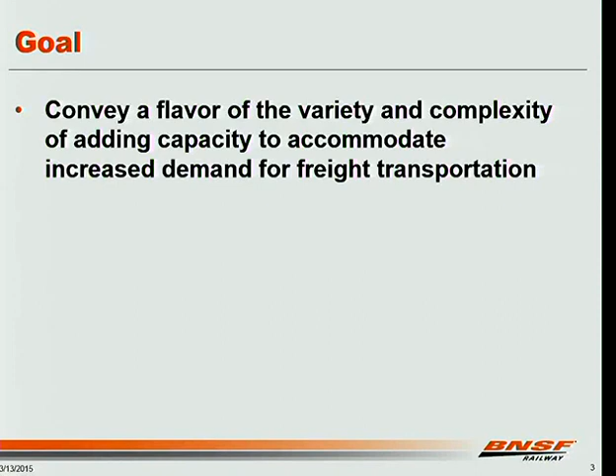I will tell you that this is going to be a very different presentation. This will be light on numbers, light on science, light on graphs. What I wanted to try to do in this presentation is convey to everyone here a flavor of the stuff that we do, the variety, the complexity of what it means to actually try to add capacity to your railroad infrastructure, especially when you're trying to accommodate increased demand in freight transportation, which, unlike passenger transportation, can grow quickly and unpredictably as markets change.

So I'll give you a real quick overview of where I'm talking about, go through where the projects we've had have been over the last few years, just physically where they've been located, and then go through a few different kinds of projects we've done and try to give one quick example of each, and then give my soapbox stuff at the end.

I do have a lot of slides. I'm going to try to go through them quickly. However, it is fine with me if we don't get to all of them. So please, if you have questions and you want to stop me and ask a question, feel free to do so. I'd rather talk about what you want to talk about than get through necessarily everything that's in the presentation.

So BNSF, this is BNSF's northern region, roughly speaking, and I don't want to spend too much time on it other than to point out that it spans roughly from Chicago to the Pacific Northwest. The region I'll be talking about in more detail is this area here, which, as you can see, is not only connected to Chicago and the PNW, but also has lines that go south towards the Texas-Oklahoma area and the Gulf of Mexico.

More specifically, this is the region I'm going to be talking about, partly because it's been the most interesting place to be railroading for the last few years, but also because it's where I work, so I know something about it. We do have a lot of stuff going on in other places as well, I just am not qualified to present on it, so I thought I'd talk about this instead. Some of the high points here: Minneapolis-St. Paul is here, Chicago is down here.

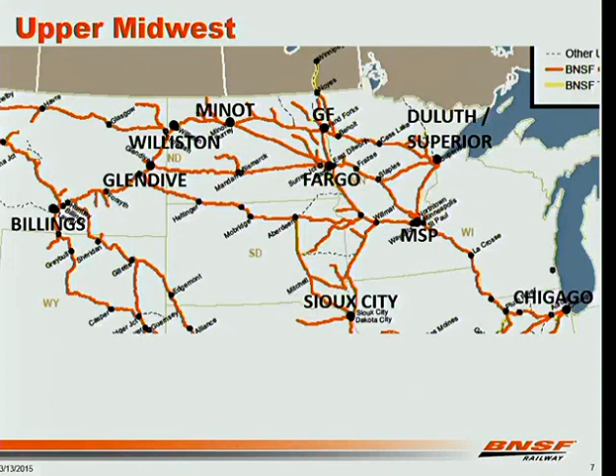Whereas I guess I would say Minot is kind of on the eastern fringe of the Bakken development, and it serves as kind of the commercial and business center for much of the region.

Roughly what's going on is a huge increase in traffic. Since 2009, traffic into North Dakota has basically doubled. Traffic out of North Dakota has basically tripled.

Every dot on here represents a place where we've either had a new or expanded customer facility come online. A lot of those in the Minot area, where you see sort of between Minot and Glasgow and between Bismarck and Forsyth, a lot of those are related to oil.

But even the oil, it's not necessarily shipping oil. We ship a lot of sand, we ship a lot of pipe, and I believe we ship a fair amount of building supplies and everything just to deal with the construction that attends an oil boom.

However, you also see that we have dots all over the place, and most of those don't have anything to do with oil. What those have to do is the agricultural industry in that part of the country that continues to grow.

Improvements in crop technology, and some changes in the continuing evolution of how product is shipped, have resulted in some big years for agricultural shipments as well. They're not as big a percentage increase as, say, the increase in crude by rail, but in absolute volume terms, I don't remember whether they're larger, as large, or slightly less, but they're big.

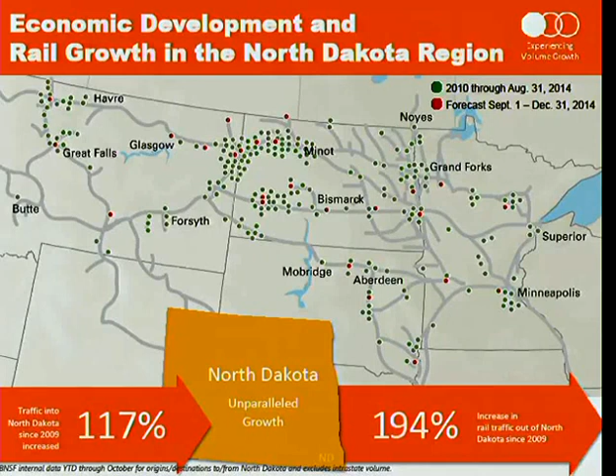So year by year: in 2011, which was my first year as a project engineer, we were focused on some improvements. We made a few improvements in the Minot area to deal with the nascent oil boom. We also made some improvements along our north-south corridor because we thought a lot of that oil was going to be going to the center, to the Texas-Oklahoma area where traditional domestic oil markets were.

That did not actually pan out that way, by the way. So we did some work in 2011. We haven't done a whole lot there since, although we have some more in the works.

2012 to 2014, we were scrambling to catch up to demand. That's probably not a fair statement - we were working hard. We had traffic that exceeded our forecasts.

The ever unpredictable grain harvest came in big for several years in a row. We had some really rough weather last winter, and all of it combined to create a huge discrepancy between how much people wanted to ship and how much we were able to ship. That led to some service problems.

But I want to point out that we had been working on expanding capacity before that happened. Unfortunately, we do not have a perfect crystal ball, and we were not able to get ahead of it until - well, I guess I would say we still aren't ahead of it.

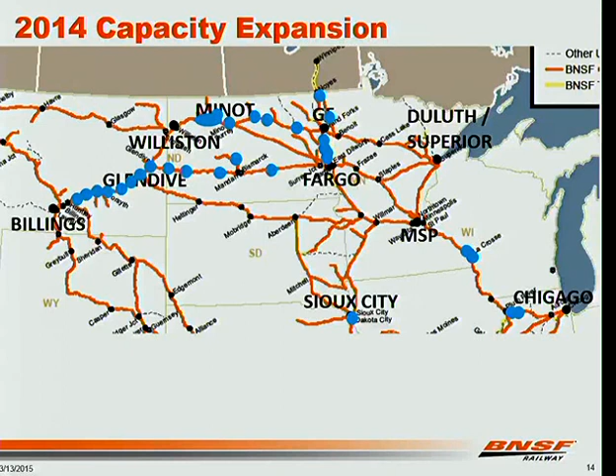You see that most of this is all concentrated right there in North Dakota. That's where we had the biggest mismatch between the traffic that people wanted to ship and the infrastructure that we had in place. Coming into 2015,

having blessedly had a relatively mild winter so far, we're in much better shape. We've added a lot of capacity in North Dakota. We have to continue our biggest project out there, which is a large double-track project on that Glasgow subdivision from Minot to Williston.

And we have some additional CTC to install. I'll take a brief side note to mention that we've delayed some signal work, some signal capacity improvements, just because of the sheer volume of signal work we've had to do to implement PTC. We're starting to turn the corner on the signal infrastructure side of PTC, and I think we're going to start to see some additional signal improvements aimed at capacity as we free up some of our people to do that.

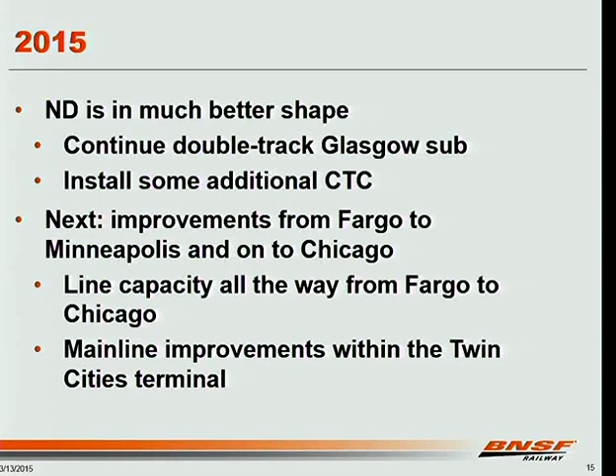So we're kind of working on North Dakota. We've got that sorted out, at least for now. Still have more work to do, but we're on a good path. The next challenge is, now that all this traffic can move out of North Dakota, it moves right into Minnesota, and we have to make room for it to flow through Minnesota.

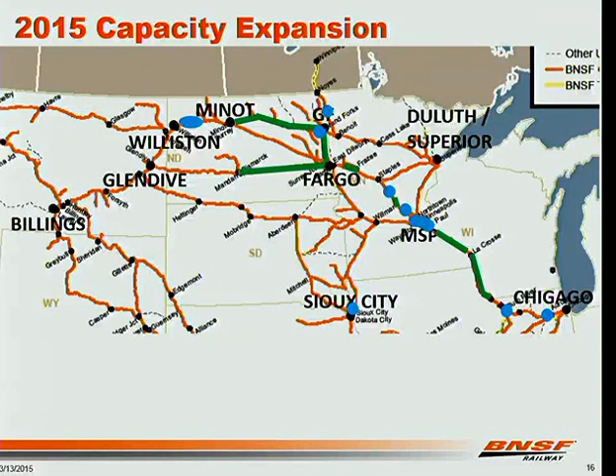And so that's really the focus this year, is to add capacity the rest of the way down to Chicago. So this is where our projects are in 2015. The green lines are CTC projects, and the blue dots are track improvements. To go through, you can categorize these in different ways, but I'm going to talk about several different types of projects that we do.

The first broad category is simply line expansion. You have trains that need to move from point A to point B. How do you get them where they need to go? The prototypical example of expanding line capacity is if you have a single track line, you build a new siding. In some cases, you might extend an existing siding that's too short for modern trains or something like that.

The only point I want to convey by talking about this project is how, once you've made the decision to add a siding, you've only begun really my job, which is first and foremost, before you can do anything else, figure out where the siding is going to go.

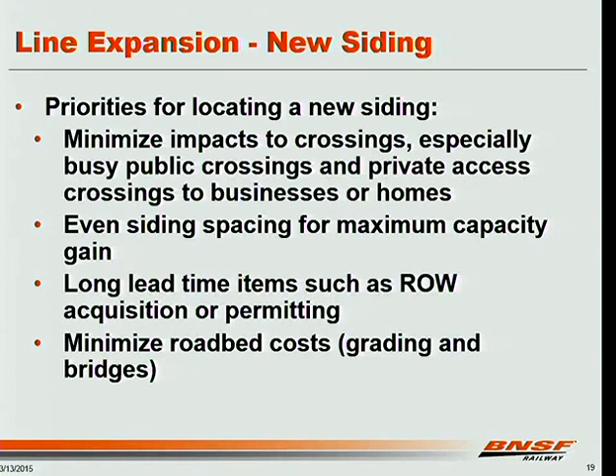It wound up going through condemnation, which is quite unusual. And of course, minimizing cost - you want to avoid large cuts, large fills, and especially large bridges. So those are kind of what we look at.

Here's an example. Someone said, go build a siding on our Hillsboro subdivision between Hillsboro and Thompson, North Dakota. There's one siding in between there, but it was only about 5,000 feet long - not long enough to hold the kind of trains we were running. On the other hand, you have this problem that there were roads on every section. We had a north-south line, and there were roads running along every east-west section line, township or county roads, literally for 50 miles in a row.

So we immediately started looking for - is there one of those roads that we think we could get away with closing that's located close enough to where we need this siding? So I was driving around. This is actually after I drove in on this grass road for quite a while. I actually saw these crossbucks from half a mile away through some tall weeds. Drove in there and found this crossing.

I will say we wind up doing this on a lot of projects where we target a road and see if we can go close it. This is the only one we've actually succeeded in doing so. People like their roads and their crossings.

Obviously, this road is not doing anyone any good. It's a safety hazard and a maintenance problem for the railroad. It's everything that shouldn't be there. Fortunately, the township more or less agreed, and we came to an amicable agreement to close the crossing. So immediately we knew where to put our siding based on that.

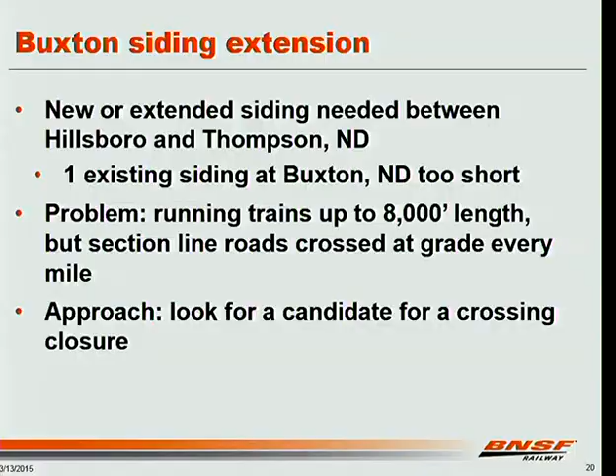On the other hand, the other prototypical example of line expansion is to add double track where you have single track. We wound up doing that on our Glasgow subdivision, but it took us a little while to get there. In 2012, we added one siding, and while we were in the process of building that, we were planning to do three new sidings in addition to that over the next three years—2013, '14, '15.

That was the plan as of August, as best I could find going through my records. By November, the plan was to build all three of those sidings the following year, in 2013, which was a challenge because we didn't have any of the engineering done, and we hadn't completed the required wetland delineations, which you can't do when they're under snow. So we had to work hard to get the engineering done on those in a timely manner.

So the following spring came before we could even get people out there really working on these three new sidings. Then word came down: we're going to finish those sidings, but we're also going to double track the whole subdivision. They wanted to do it over the next three years, so we're in the middle of that now.

But in 2013, they wanted us to build as much of the grade for the following year as we could. So we'd build the three new sidings and put them in service that year, plus build the grade for about 40 miles of double track that we'd then lay the following year.

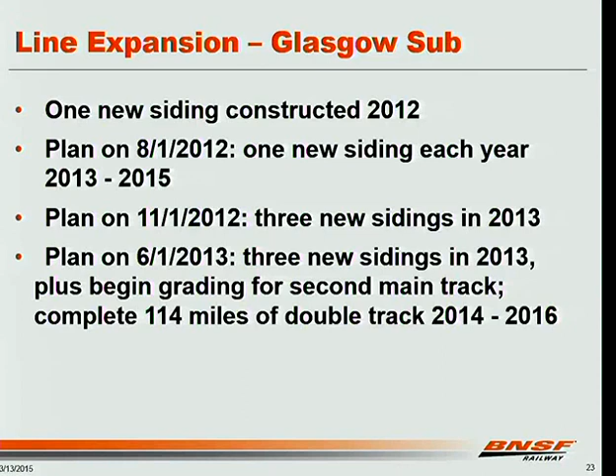Okay, you want us to build a second track and you want us to start on it tomorrow. There are some questions we have to ask, like where? There are two sides, and oftentimes neither of them is perfect, but you have to figure out which is better.

And when you do have an obstacle, such as a large wetland, you have to figure out whether avoiding that obstacle makes up for the difficulty of having to transition your tracks to different sides for the new construction. What do we do with existing sidings? Do we want to just tie them into the double track, or keep some of them for staging trains or having faster trains overtake slower ones? And what right-of-way and permits do we need?

Those are hard questions, because to know the answer, you need to know where you actually need to work, where your grading limits go to. And to know that, you have to have something resembling your final construction plans.

So these are long lead time items that you can't start until you have the engineering up to a certain point. So in many cases that year, we actually wound up jumping the construction around a little bit based on where we had right-of-way and where we had permits and where we needed permits.

Fortunately, we had an excellent contractor working for us. Ames Construction did a fantastic job on this project and had worked with us enough to know that what the railroad wants is for them to get it done, and we're perfectly happy to hop around as needed in a way that we could both live with.

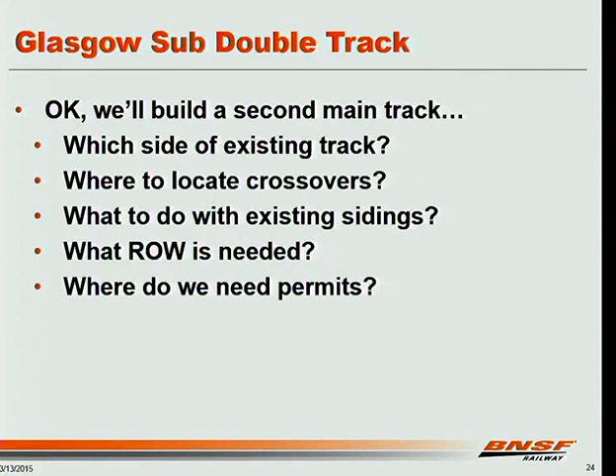Signal work has an arrangement these days that kind of splits the burden a little bit between contractors and employees.

So this is what it looks like overall, and this is only half of the Glasgow sub, but it's the part that concerned us most, from Minot over here in the east end, to Williston way up here. The blue lines are places where customers operate facilities. They either lease a small amount of track from us, but in most cases have built their own track to receive or load rail cars.

The red lines are capacity expansion projects that we completed between 2012 and 2013. We built the 4 new sidings that we talked about, as well as some improvements up in Williston Yard.

And then the solid green lines are areas that we graded in 2013 and started laying track in, I think it was February of 2014. The dashed lines are work that we did the grading for in 2014 and will lay the track for this year.

I bet track laying in February 2014 was fun. Yes, it was. Fortunately, I didn't have to go there and do it.

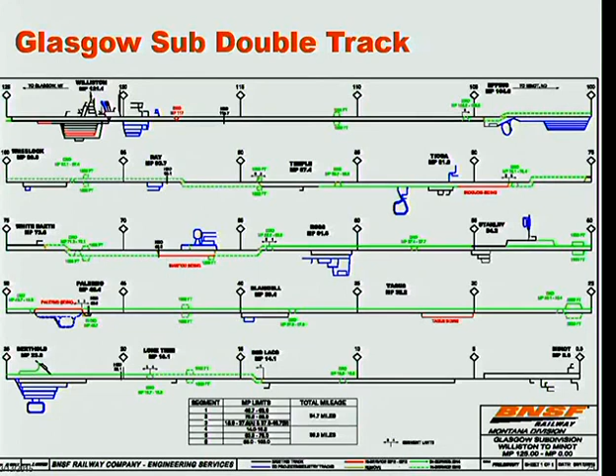And then the other, and in some ways maybe even more critical function to some people, is they serve as a place for maintenance gangs to tie up at the end of the day. As you can imagine, the people who approve these projects focus a lot more on train movement, so we tend to refer to them as set-out tracks if we want to keep them in the plan.

So anyhow, the solution is basically we had to go and build a lot of railroad on land that we didn't own. We couldn't own it because we couldn't get the title work done. And that actually is not so bad. We actually kind of do that routinely. You have to have some sort of contractual agreement with the owner that gives you the right to do what you're doing.

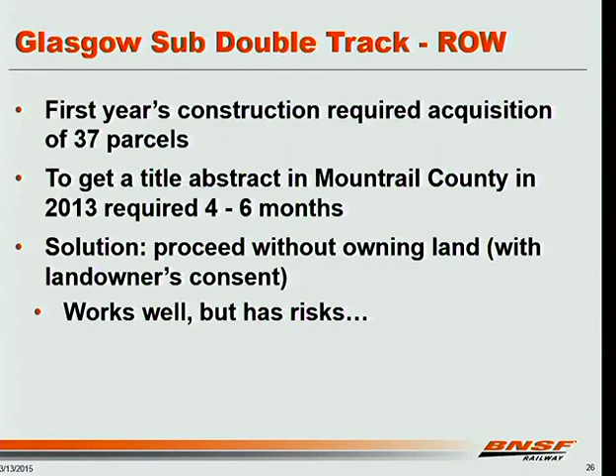It has some risks that we ran into. There were cases where landowners had easements across their property, third parties owned easements across their property that they may not even have known about and certainly didn't tell us about, that we had to go back and deal with those third-party interests after the fact. Fortunately, I think we've gotten all those worked through. But the alternative would have been not building a railroad on land that someone was willing to sell us.

So this is what we did. And it worked out, I think, okay.

Some other challenges in addition to right-of-way: short construction season and spring road restrictions. I assume they probably have those here in Illinois, but they have them in a big way up there. Usually for about 2 months every spring, no heavy trucks can operate on most of the roads in the state without paying a whole lot for a permit. Especially where we were working, where most of the roads are gravel-topped.

So that's two months a year where if you don't already have your contractor's equipment in place, and if you can't build out of material that's entirely on site, you're basically not working. And that follows this, 4 months or whatever where the ground is too full of frost to get anything done. And then even earlier in the winter, before the frost really sets in, you still have the problem of moisture conditioning and compacting the soil when the surface water freezes. If you try to water down gravel to get correct compaction or anything, it'll freeze before you can compact it. So the seasons and temperature-related stuff are a big impact on the schedule up there.

Wetland permitting: we went through a number of wetlands, some of which we needed federal permits for, some of which we didn't. The ones that we did need federal permits for, all those permits were pending when Congress and the President couldn't agree on a budget deal and the federal government shut down. The people who process those permits are not considered essential government employees and were home for a week or whatever and came back with that much more of a backlog. I can't speak from having personally talked to them, but I know if I were them, I probably would have come back with a morale problem too.

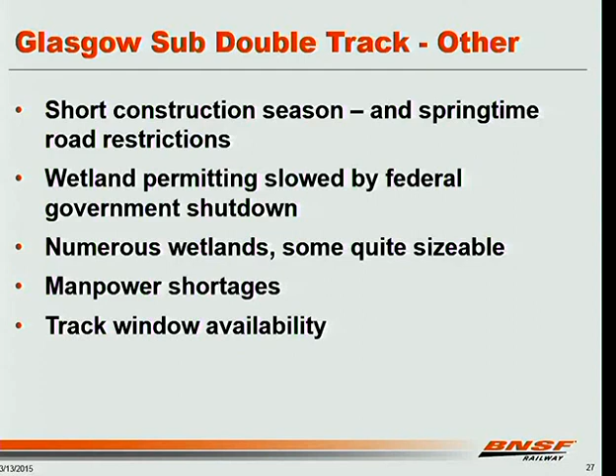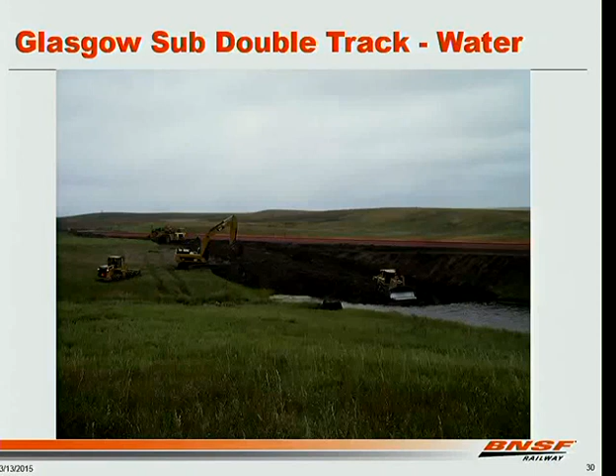In the eastern part of the state, it's a little different. There used to be a big lake in the post-glacial period that's filled in with some pretty bad muck. But out here, there's a mixture of different soil types, some good and some bad.

And there's enough good stuff that you can make a go of it. I believe this picture shows us having built up to the edge of a wetland that we didn't yet have a permit to build through. So they literally built right up to the edge and stopped and went to work somewhere else. Came back and got this spot later.

And I mentioned track window availability. I would say in some respects it was less of a problem than we thought it would be. This is a high priority project for the company, and they made it happen. The only caveat was that we had to do all of our track windows at night, based on the schedule of Amtrak and the priority intermodal trains. But we routinely would get 2 track windows per week to put in turnouts, 6 hours each.

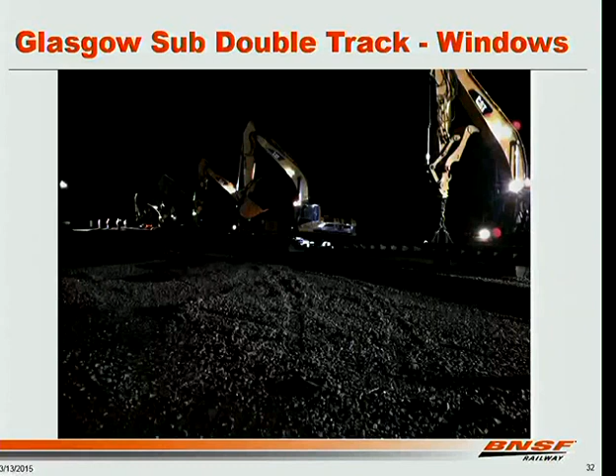With the exception being if there were production gangs doing rail or tie replacement anywhere else on the subdivision, then it was a little bit more of a stretch to get the windows.

So that's line expansion. That's pretty straightforward. You have one track, you build another track next to it. Terminal expansion is, in some respects, a more interesting topic because it's more complicated, with a lot more variables and a lot more thinking about what you want to do to start with.

For those who might not be familiar, a hump yard takes cuts of cars, shoves them over the hill, and then computers control the cars into different tracks, sorting the cars by where they're going. Then you take those blocks of cars, pull them out of those tracks, and push them into your departure tracks. Once you've got all the different cars you need for your train, you lace up the hoses so the air brakes will work, do your air brake inspection, put the power on, and depart.

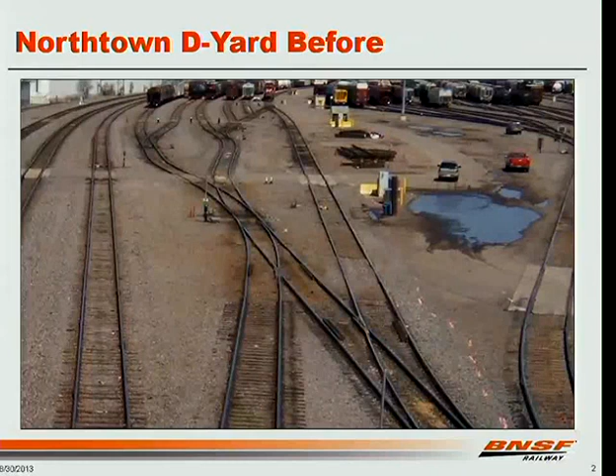But the net effect was that some division engineer at some point got tired of dealing with tiny derailments in this area and put a 5-mile-an-hour speed restriction on it. So all these trains that had to move through this one spot did it all at 5 miles an hour.

We fixed it. It was a significant amount of work. It shut down the yard for 2.5 days, but we fixed it.

Pretty pictures, so I thought I'd show them to you.

But it's a good example of how sometimes in a terminal you have just one spot that's really holding everything back. This is a huge yard, it's got all sorts of needs. But just by doing this one project, we made a measurable increase in the amount of traffic that this yard could process in a day.

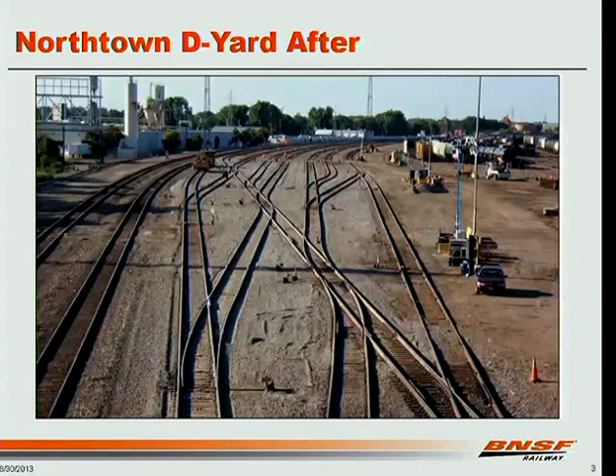The other project, also in the Minneapolis area, that we've actually begun construction on now, is also terminal expansion, but it's on the main lines.

So just to be clear, the terminal doesn't just mean the yards. It means everything that happens where you have a bunch of rail lines coming together and a bunch of rail yards and a bunch of transfer moves and several different railroads operating over trackage rights and everything else.

It's just as important to keep the main line flowing as to actually have your yard processes work well. I think there were times last winter when we learned that we had to stop building trains in the yard because the departure tracks were full and they couldn't get out on the main line.

The goal of this project is to take a line that had not been used very much for through traffic since the Burlington Northern merger or thereabouts. It's still being used, it's always been used pretty regularly, but it was mostly used for accessing a couple of intermodal yards that we have on it. It's used for some trackage rights trains, and for some routes from certain other lines to certain other lines that have to take it. But where possible, through traffic has traditionally taken a different route through the cities.

That line is nearing saturation. We have the ability to upgrade this line and put it to work relieving some of that burden.

Oh, I just turned that off. Good, it came back on.

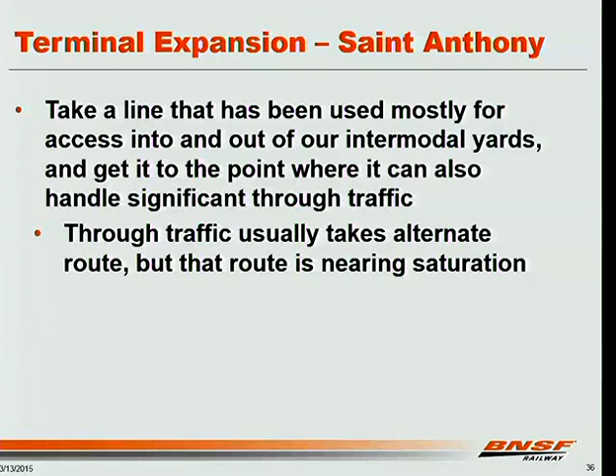Which is how you get rid of diamonds, right? You replace diamonds with switches and crossovers, and you save a lot on maintenance. It was the appropriate thing to do, I'm sure, in 1982 or 1983, whenever it happened. But it's a pretty severe bottleneck to trying to move through traffic through this area.

Actually, east of here we have 2 main tracks. Going west from here we only have 1 main track, so that's kind of another bottleneck as well. So what we're proposing to do is double track that 2 miles of single track.

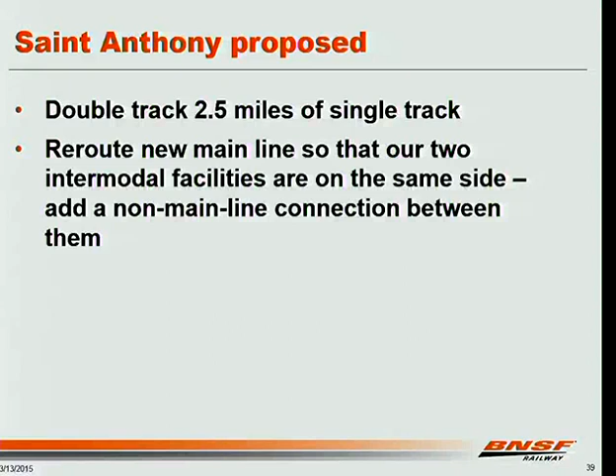All of those moves today have to go through the main line. So we'll actually be rerouting the main line to the other side of one of these yards and creating a connection between the 2 that allows them to go through without having to go from one yard to the other on the main line at all. So that's a rough drawing of what it'll look like.

For reasons I can't explain, this actually seems easier to understand than just throwing the actual plan view up here.

One question though—it looks like the road bridges going overhead were already double or triple wide, so this would have been a lot cheaper, right? But would there have been a difference had you had to redo the road bridges as well?

The question was whether it appears the bridges were all wide enough to handle the extra track, and would this have been a very different problem if the bridge piers had been situated differently. The answer is yes. However, we did do a fair amount of designing around the piers that were there, and there was enough room in all to make it fit.

I have not yet been involved in a project where we had to actually go to a road authority and have them rebuild a bridge, which is good, because that would not happen on our timeline.

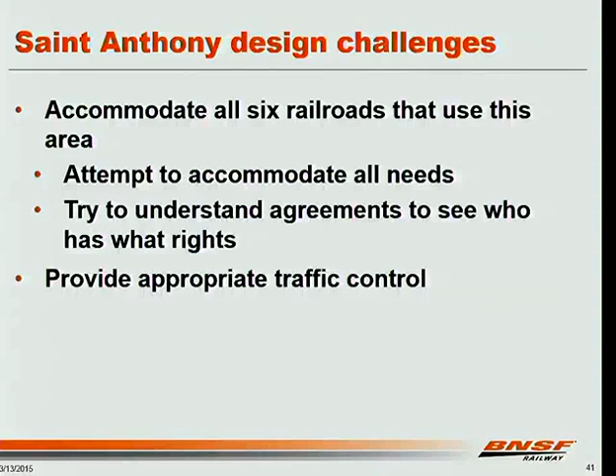On the construction side, this project has some challenges just because of the tight quarters. We've got places where we're building new tracks in between existing tracks that are both live. We have limited access in and out, and limited space in general in this corridor.

On top of that, this is the oldest railroad in Minneapolis-St. Paul. It was part of the first railroad built in the Minneapolis-St. Paul area. It has a lot of history in the ground, and there's the potential for contamination in any of the soil that we excavate.

Even if it were easy to find people who need large amounts of fill dirt in the middle of a city, which it usually isn't, we would have to test this material before anyone would take it. So we have to stockpile it and test it. We're already short on space, so finding room for large stockpiles of dirt that can be tested, and then handling it twice to haul it out, just makes the challenges related to tight space that much more acute.

Phasing work to minimize the outages. I'll point out that none of these lines, for the most part, line up with where existing tracks are. We're not just building new tracks—we're taking one track configuration and wiping it out and building a new track configuration in the same place. Obviously, you want to do as little of that in a single window as possible.

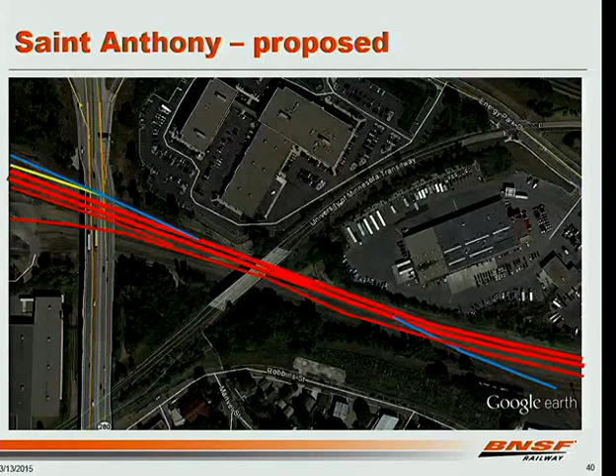By doing some tweaks where we can put this turnout here and budge this track over there ahead of time, and do this and that and the other thing, we've gotten it down to the point where we think we'll be able to do this with a 24-hour absolute window. That's still early planning phases. But if you had to do all of this without doing some preliminary prep work and figuring out how to tweak your design so there's room to put this proposed turnout in without interfering with this other turnout that's already there, that would have been a much larger window. So we spent a while on that phasing.

Accelerated schedule requiring winter work. We started the grading for this project last fall. We did not complete it. However, it's farther along than a lot of the other construction projects, and we've got these track construction gangs that need a place to go—they have to keep busy all year. They won't be able to finish our big expansion program, so they're coming our way earlier than I would choose to have them there. That's almost always true.

So we have kept working on tasks that we can work on all winter.

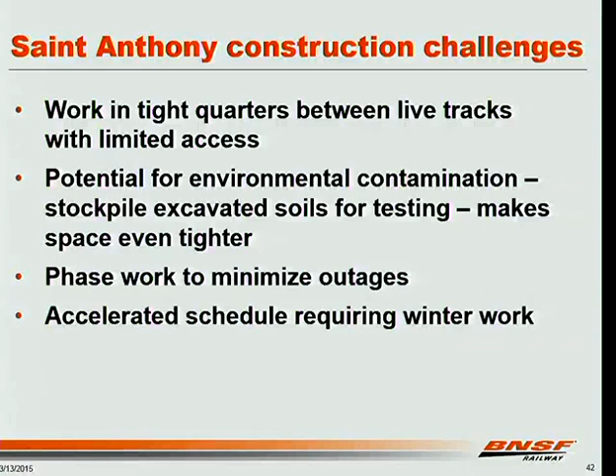I give this as an example of some of the challenges in working in tight spaces. This is not Minneapolis—this is a project I did in South Sioux City, Nebraska, across the river from Sioux City, Iowa, last summer. But it has many of the same conditions we expect to find on our St. Anthony project.

In this case, there used to be a track in between these two tracks. It was in poor condition—it had old, small ballast, it was full of mud. Wasn't much to salvage there, so let's remove it and rebuild it. Sounds good on paper, and in fact it is the right thing to do. Took me some convincing to ever do this again after what happened on this project, but I was convinced.

You remove that muddy ballast, and under it you just find more mud, and more mud. The only real solution is to dig that soft stuff out as low as you can, to the point where you hope you're out of the heavy influence of the live loads going over it. There's a limit to how deep you can dig without undermining the adjacent tracks. In this case, the track on the right is a live track.

The track on the left we were able to take out of service during construction. In the project we're doing in Minneapolis, that won't be the case. We'll have to do a short stretch of this work between two live tracks. So there's a limit to how deep you can dig.

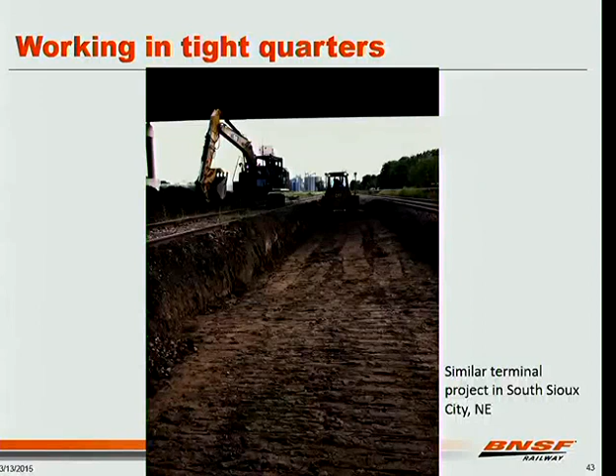Of course, in the process of digging as deep as you can, it's fine to dig this deep next to a track as long as you don't have a train on that track. On the other hand, we're expected to do this work without delaying trains too much. So you have to be careful about how big a hole you open up and be able to get it backfilled when you know a train is coming. Not backfilled all the way, but enough to maintain stability of that track next to you.

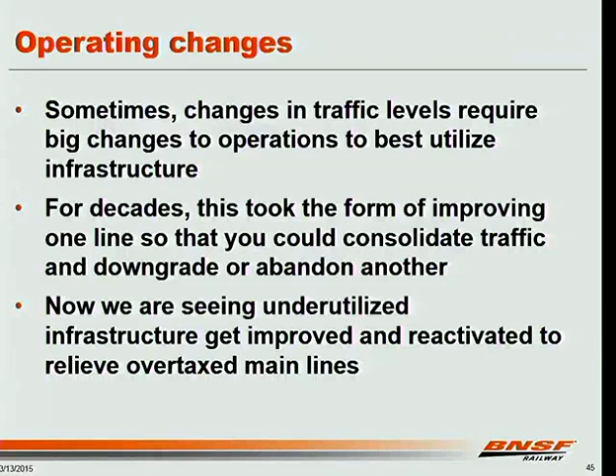Recently, we've started to see that turn around in some cases. Now we're starting to upgrade lines that had been downgraded before, and change our operational patterns to take advantage of lines that weren't necessary even in relatively recent times, but which now are. The Midway subdivision would be one example of that. An even niftier example is one I'm going to show here.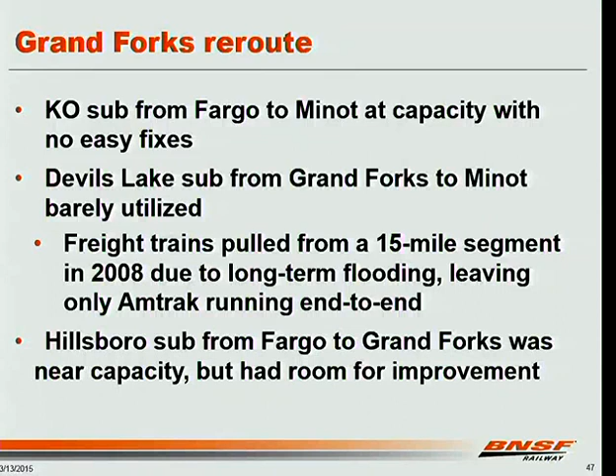So what we're doing today is we're implementing a directional traffic pattern. The KO subdivision still has trains going in both directions, but the majority are eastbound. The Hillsboro sub from Grand Forks down to Fargo still has traffic in both directions, but the majority we call westbound, though obviously they're mostly going north. The Devils Lake sub, at least as far as through traffic goes, is completely westbound traffic, except for Amtrak.

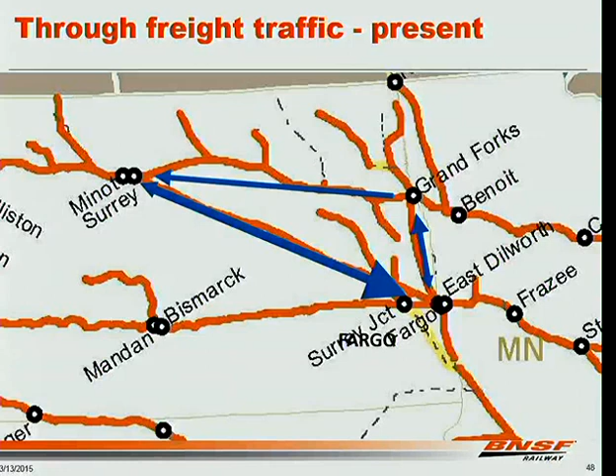So to support this, we had to make some improvements, but not nearly as much as what we would have had to go in and do, at least in terms of new track construction, on the KO sub.

The first thing we had to deal with was this flooding issue. That's a topic all on its own, and I encourage anyone interested to go look at the presentation one of the consultants who worked for us on this project did at the 2013 AREMA conference on phase 1 of the project, which turned out to be a 3-year project. We had to raise 2 bridges and roughly 10 miles of track by varying amounts to get it above the level at which the lake would begin to overflow its basin.

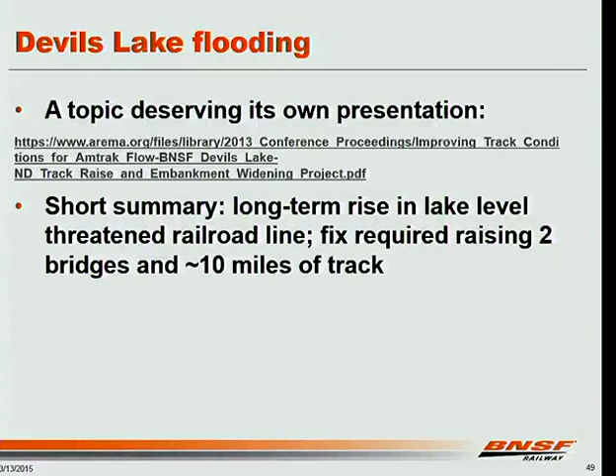With that taken care of, we still needed to do upgrades on these tracks that had not handled much through traffic and weren't set up to deal with it. On the Hillsboro sub we had the most acute need, since it has traffic in both directions. We made improvements to existing sidings, built some new ones, and wound up with roughly 15-mile siding spacing on that subdivision.

Devils Lake sub, on the other hand, really only has the westbound trains, and then there's a few little trains that have to swim upstream against it. Unfortunately, one of those is Amtrak, so everyone has to get out of Amtrak's way. So we needed enough good sidings that trains could get out of the way of those few running in the wrong direction, hang out there while a train went by, and then take off again.

So we wound up being able to get by with just upgrading existing sidings. I think we extended one of them a little bit. But for the most part, we just made them CTC islands in what was ABS territory, which means they did not have to throw switches by hand.

Hand-thrown switches in this day and age, with no caboose, present a problem for a train going into a siding. There's no one in the back of the train to reset the switch for the main line. If you're running mostly freight, that's manageable, because you can stop the train coming the other direction and line the switch back. But when you're running Amtrak, that's not acceptable - the freight train has to be out in the clear with the switch thrown back. So CTC was key to running significant westbound traffic here while still keeping Amtrak going through.

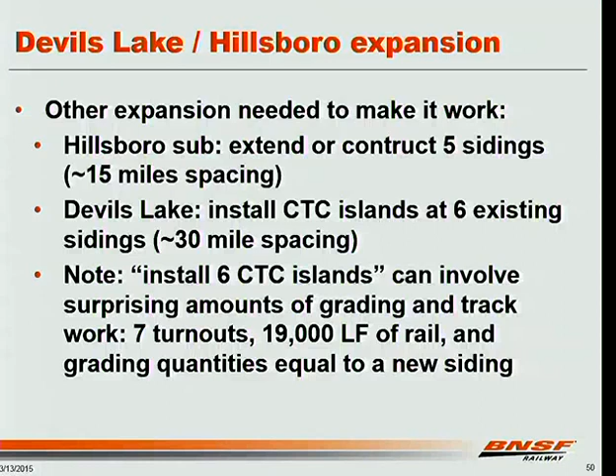So just a few thoughts I wanted to share with you, and you're certainly free to leave if you don't want to listen to someone just spouting off here.

You know, the railroad industry is a huge player in our domestic transportation market. We carry - I don't know, Chris, what percentage of all ton miles do we carry these days? Like 42%. 42%. Despite that, though, in some ways we're almost a little bit of a niche market, right?

We ship a relatively small number of commodities between a limited number of origin-destination pairs. It's a large number of origin-destination pairs, but it's limited. It's nothing like, say, the highway network, where people routinely get on anywhere in the country and go anywhere else in the country.

And many of those industries are kind of heavy industry. They tend to be very cyclical. They tend to have their ups and downs as markets vary. And so the demand for our services can turn very quickly.

That makes forecasting the growth that you need kind of difficult. I think I'm not a traffic planner, and so I apologize, I certainly don't want to insult any traffic planners in the audience. But they have advantages that we don't in forecasting. You can kind of look at how urban areas are growing and get a sense for where you're going to need capacity in the future. You have time to do some environmental impact statements, get the construction in the next bonding bill, and so forth.